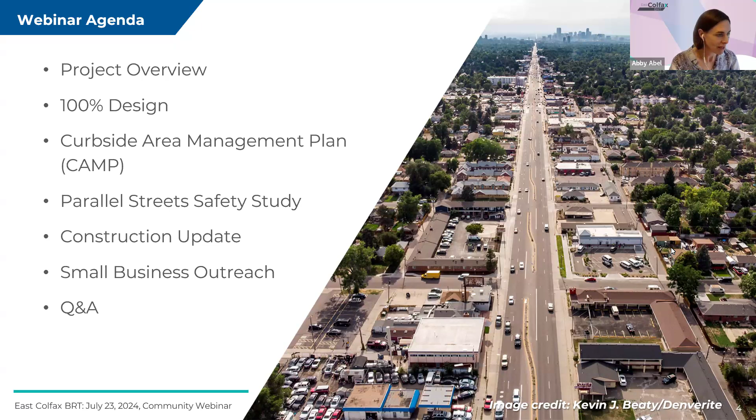To take us through these topics, we have a great team assembled this evening, and I'll take a moment to introduce them, and you'll be hearing from them momentarily. First and foremost is Jon Stewart, who's the project director for this project from Denver's Department of Transportation and Infrastructure. James Moore, who is the design lead on the project. Nick Vanderkwaak and Charlie Alexander have been leading a lot of the transportation components of this project, particularly the CAMP, the Curbside Area Management Plan, and the Parallel Streets Safety Study. Marcy Lochran will be taking us through the construction communications and the plan. And Ryan Lewis leads small business outreach and will be taking us through some of that in conjunction with Joanne Greek, who joins us from Denver's Economic Development and Opportunity Group.

And so we look forward to hearing from this team this evening. And with that, I will turn it over to Jon Stewart to take us through the project overview. So Jon. All right, thank you, Abby. Everybody, thank you for joining us for this webinar. Let's get right into the project overview. First, I kind of want to just reiterate why we're doing the project and what the project is, just give a brief recap.

The vision for this project is to move people more efficiently, safely, and sustainably along East Colfax Avenue. That highlights three priorities we've heard from the public, the citizens of Denver, over and over: to provide more transportation options, to increase safety of the transportation network, and to provide more sustainability and environmental resilience. We believe this Bus Rapid Transit project hits all three of those goals.

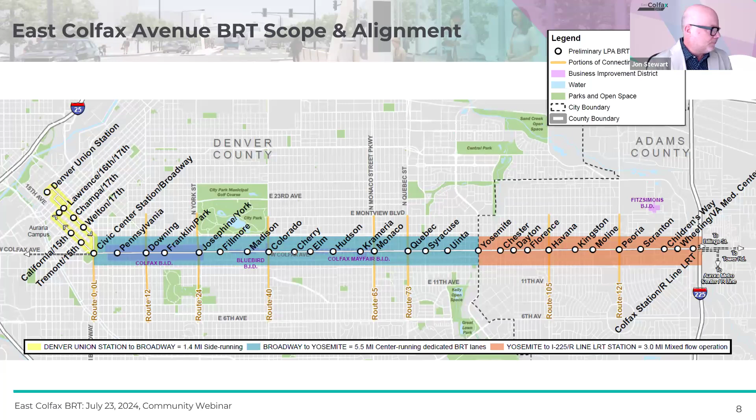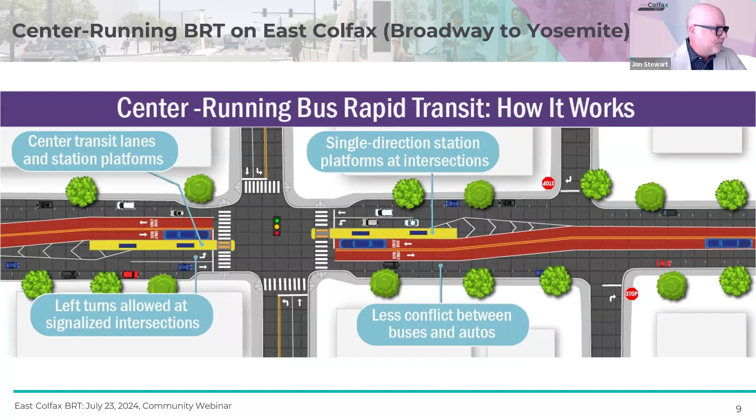This promotes less conflict between buses and cars, allowing buses to move more quickly. Left turns at signalized intersections promote safety, since we currently have a lot of conflicts between left-turning vehicles and bikes and pedestrians. This also shows the center-running bus lanes with the station platforms.

So where are we in the project? We've just completed 100% design this month, so we'll be sharing those design plans with you. Earlier in the year we submitted our request for FTA funding, which occurred in the spring, and we finished our environmental review, also in the spring. Earlier in the year we finished our 90% design, which was our last touch point with the community. Now we've basically submitted everything to FTA, our design is complete, and we're waiting for official notification of our final award amount. With that anticipated this summer, we expect to go to council with a construction contract with our general contractor, Kraemer North America, in August.

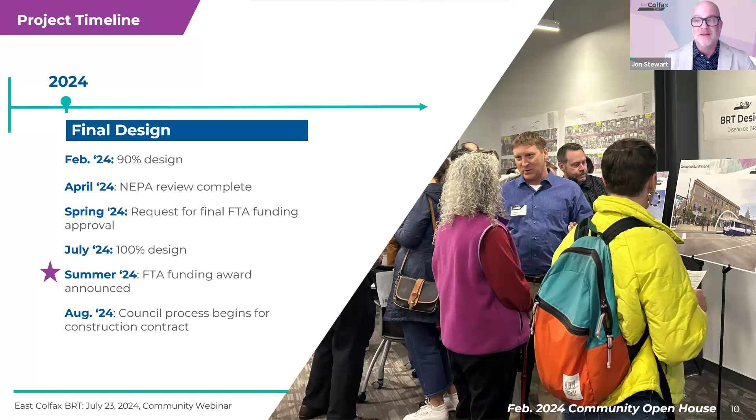Let's talk about where we're headed. We're finishing the final design process right now, having completed 100% design this month. We're waiting to hear from FTA for the final go-ahead, and expect to go to council next month for the construction contract. Once that's complete, we'll issue a notice to proceed to the contractor, expected toward the end of September, with construction starting in October along with a groundbreaking ceremony. We expect construction to start this fall and take about three years, going until the end of 2027. We're basically waiting for written confirmation from FTA on our approval, and then we'll move to construction this fall.

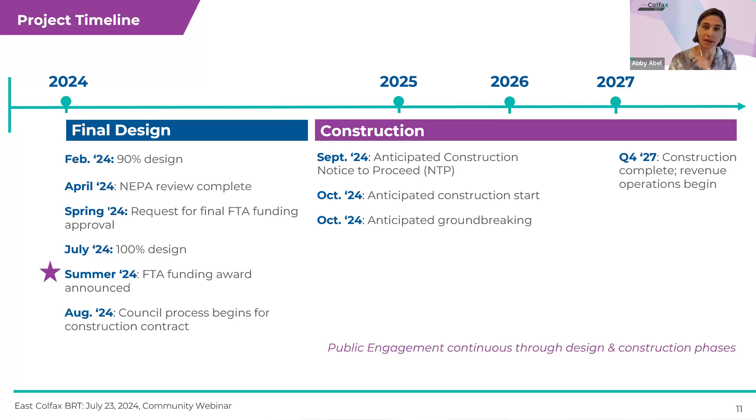Thank you for the project overview. We'll shift over to James to talk about design, which includes, to respond to a question in chat, the stations, the streetscaping, and the branding elements. James will walk us through where we are with all of those pieces. Go ahead, James.

So if we can go to the next slide here. To start, I'll give a recap of key BRT features for those of you who maybe weren't attending the previous webinar.

Dedicated bus lanes, as John mentioned, will exist in the center running portion in Denver. Specialized vehicles, RTD will be procuring a new fleet of 60-foot articulated buses. They'll have 3 doors versus the 2 doors they have now, transit signal priority equipment on board, and will allow for bikes to be loaded at the rear door versus on the front of the bus, like you see today. Enhanced stations feature near level boarding, which provides a rail-like experience, off-board fare collection, digital passenger information displays, and all the BRT branding treatments that go along with the new stations.

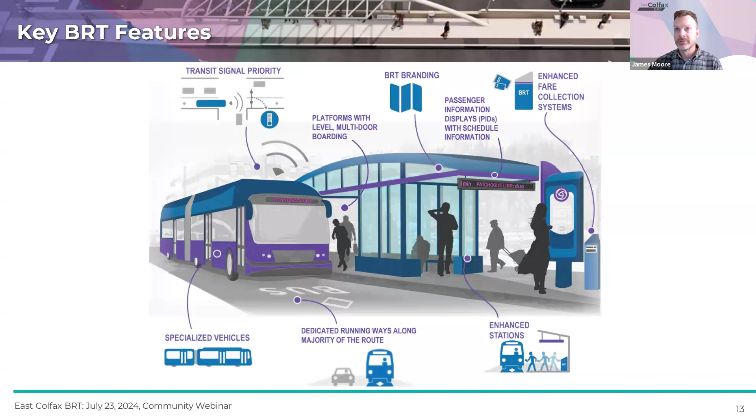100% design advances. The 100% milestone is an exciting one for the design team. As you can expect, design advances from 90 to 100% were not significant, and primarily involved wrapping up some of the more detailed elements on the project, many of which are related to utility, drainage, and structural items below the road.

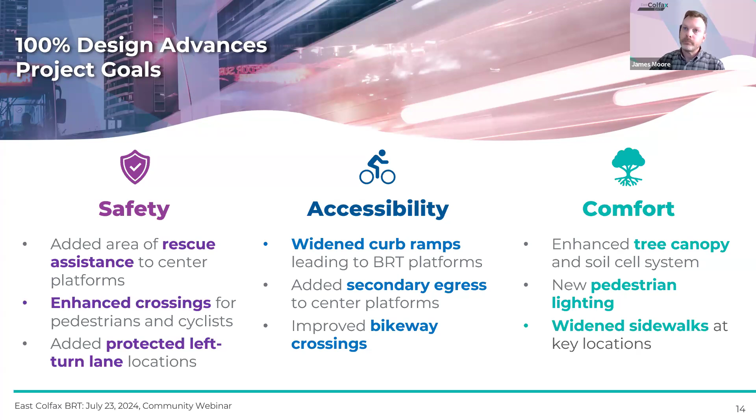We remain focused on the project goals you see here on this slide as we progress toward the 100% design level goal. Safety, accessibility, and comfort all informed our design decisions, and many of the design elements on the project check 2 or more of these boxes. Next slide.

This illustrates some of these project goals that occur at the station. Outside the station, we're proposing 6 signalized ped crossings, which falls under the safety category. As John mentioned, in the center running segment, all left turns from Colfax are protected at signalized intersections, again eliminating points of conflict, which greatly increases the safety of both vehicles and pedestrians. We've also got secondary egress points provided at center platforms, as well as emergency telephones.

When it comes to accessibility, all the elements on the station meet or most often exceed ADA minimum requirements. We've got, hard to see here, 8-foot wide curb ramps that run north-south to the center platforms. Those exceed the minimum requirement of 5 feet in the City and County of Denver. We've got gentle slope walkways from the crosswalk up to the platform. Again, it's not a ramp, it's not steep enough to be considered a ramp, it's a flat slope, and that also checks the comfort box.

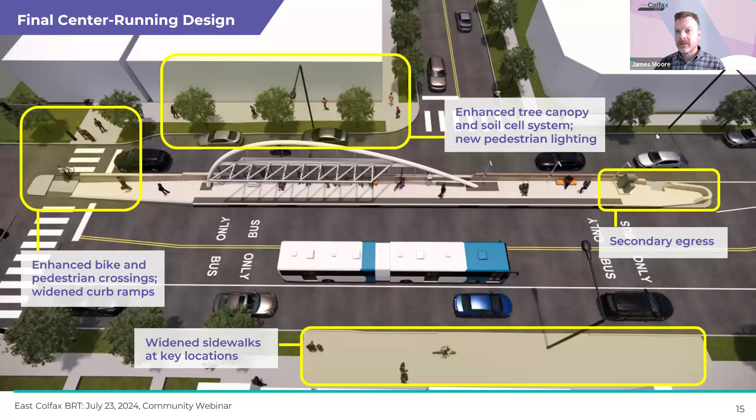I think Abby, you're going to handle that. Yep, part of the presentation. Thank you, yeah, appreciate that, James.

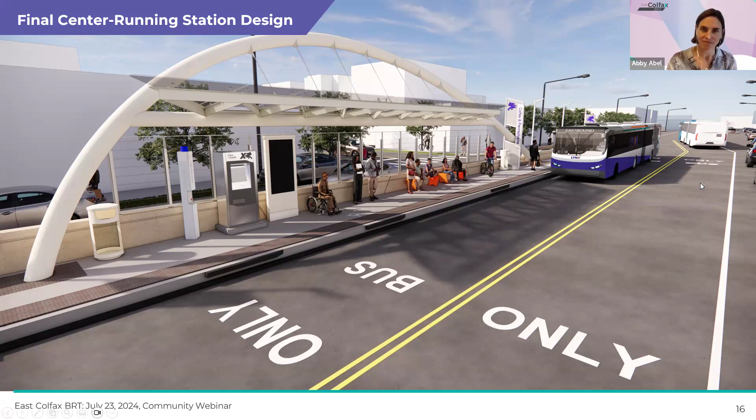I think you can also see some of the light branding on the stations and the buses too, as we move through some of these renderings. More exciting news to share is around that public art piece. So a little setup here before we share the news. As a reminder, 1% of any capital improvement project over $1 million undertaken by the city must be set aside for the arts. Just a reminder there.

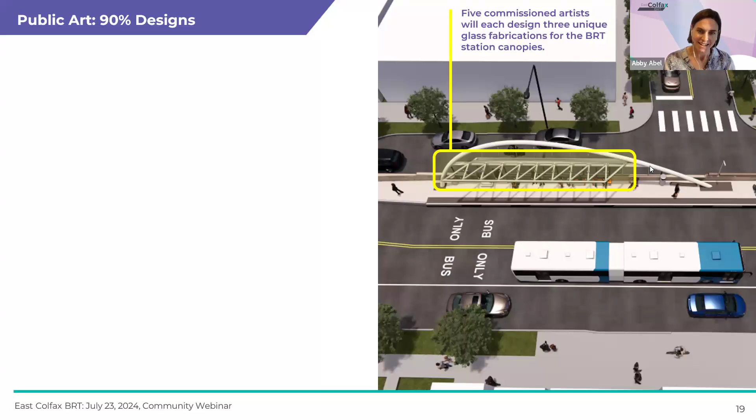Earlier this year, Denver Arts and Venues, in partnership with a community-based art selection panel, invited artists to apply for the opportunity to create art for the East Colfax BRT project, in particular for the stations, for the glass pieces that are embedded in the canopy outlined here. Five artists were selected and commissioned to each create three unique glass designs for three station canopies in the Denver portion of the corridor. We're excited to share these 90% designs with all of you tonight, which hopefully capture the feeling of Colfax.

Once these designs are complete, the artists will begin work on the next set of five stations. I can't help but note that 3 of the 5 selected artists are from Denver. Pretty exciting. You can see the artist names right there under each one of their designs.

So with that, hopefully exciting news, I'll turn it over to Nick Vanderkwaak to talk about where we are with the Curbside Area Management Plan, or CAMP. Thank you, Abby. Those are exciting, I haven't seen those. Those look great.

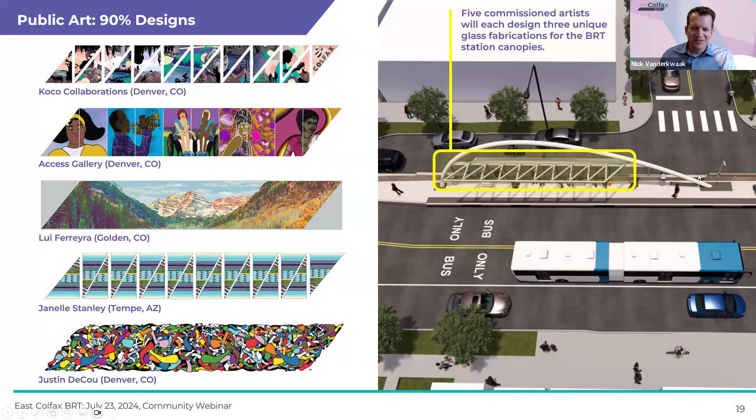I'm going to talk a little bit about the Curbside Area Management Plan and give you an update as to what we've put together as part of this planning process and how that's come together. If you could go to the next slide there.

A little background on what this is. Previously we called it a Curbside Access Plan, a CAP, just to avoid confusion - those are the same things. It's just called the Curbside Area Management Plan now.

The purpose of these plans - DOTI does these in neighborhoods all over the city and county - is to develop and comprehensively address changing conditions in an area, which could include density, redevelopment, reduction in parking supply, and a lot of different things. A lot of these things have already happened in many of the neighborhoods surrounding Colfax, and with Colfax BRT there's a lot more change happening. So it's important to understand the effect that all that change has on the surrounding area and streets.

And what we can do to anticipate and plan for parking and other curbside uses in those areas. In the process, we acknowledge that a lot of people use the streets and the curb in different ways, and understanding the needs of all those groups - residents, businesses, visitors, all sorts of people involved - we want to make sure we're accounting for that in what's unveiled here.

Through this process, we explored different curbside management strategies and put together a series of recommendations that I'm going to share with you, proposing regulations that address not only what's happening currently - which we've studied in tons of detail by understanding parking utilization on all the blocks on and surrounding Colfax - but also what may happen in the future with the implementation and changes happening with Colfax BRT. Next slide, please.

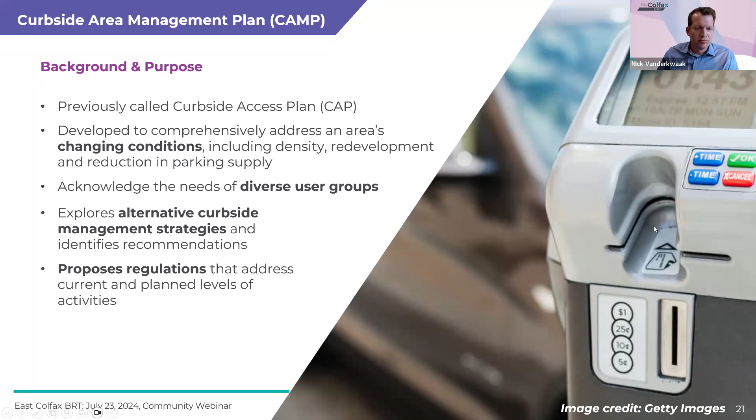So with the process, to describe what we've done: we studied parking on Colfax for the entire length of Colfax BRT and quickly recognized that some of the bigger changes to parking and some of the more densely parked areas on Colfax are in the further western areas, specifically between Broadway and Colorado Boulevard.

So we studied Colfax the entire length, and then started this process, developing this plan, really to look at the surrounding neighborhood streets and what the parking utilization is on those streets, what the existing regulations are, and what we should change to make those function better for all the users that will want to use that curb space. Through that process, we met with a stakeholder group.

We had 3 meetings oriented around this process early on last year and this year. We had 2 rounds of online engagement - many of the folks on this call likely participated in that - where we gathered some of the feedback shown on the map below here. All those points are some of the points we received with feedback. So we had a round where we incorporated some changes, and then another round where we developed more detail. More than 175 comments were analyzed and looked at as part of the process, in addition to the data process we went through to develop this.

And this all turned into one Curbside Area Management Plan, which incorporated updates for loading zones and timed parking restrictions on blocks, and other elements of the plan, including some of the paid parking on Colfax. Next slide, please.

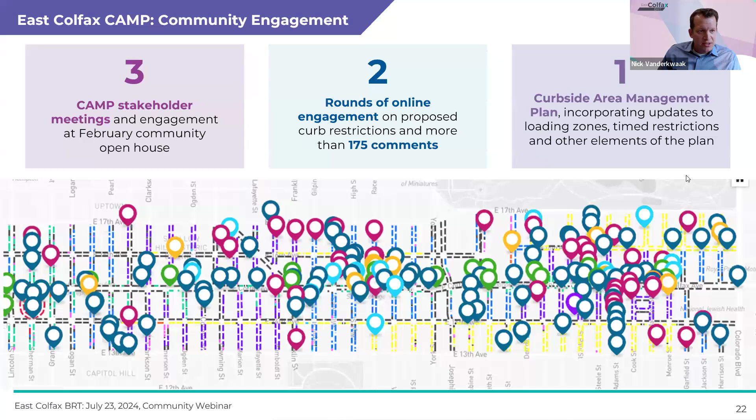I'm going to go through some of the key changes or key recommendations that came out of this effort, and then we'll talk through those.

The first one here is looking at paid parking. A lot of Colfax already has metered parking. When you look at the area west of Elizabeth Street, that area of Colfax where there is parking, it is metered parking currently.

There are a lot of changes and reductions of parking on Colfax with the BRT, so there will be less metered parking in those spaces.

This provides space for the commercial activity that needs parking, and people want to park there for those uses, providing spots that turn over frequently. So there are spaces available, and paid parking with metering is a way to do that. We have more metered parking adjacent to the commercial parcels.

There's none that will be adjacent to residential parcels or land uses along the corridor. And then also on Colfax, on the other side of Elizabeth, as we go towards Colorado, we are introducing the same approach.

The parking on that part of Colfax will also be metered, recognizing that many of those spaces were highly utilized, and making that paid makes it more available for people that need to use it. There will also be choices for other places to park if people don't want to utilize those spaces.

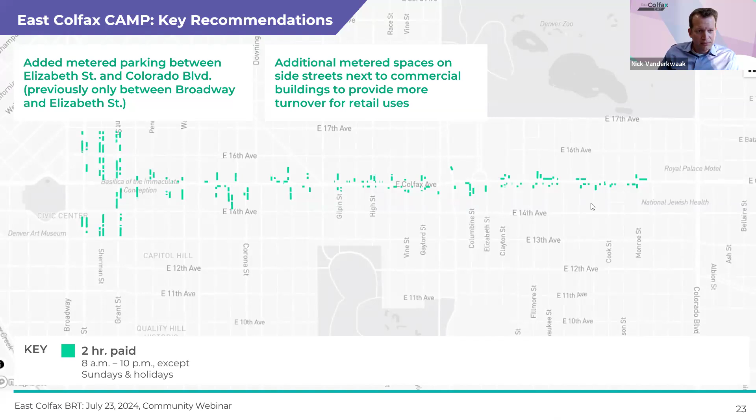The next key recommendation is looking at what do we do with loading zones, shorter time parking. One goal of these planning efforts is to simplify, rather than having minor differences between recommendations.

Making that very clear so it's predictable and people can expect, they know what things mean when they see a parking sign on the street.

Also for commercial loading for bars and businesses and other things on Colfax. Those are mostly oriented on the side streets, primarily that first spot in from Colfax, where a truck or other vehicle that's loading can easily pull in and out.

We've looked at all the land uses on Colfax and identified where the existing loading zones are, and then added some new ones where they make sense to serve the needs of the businesses along Colfax.

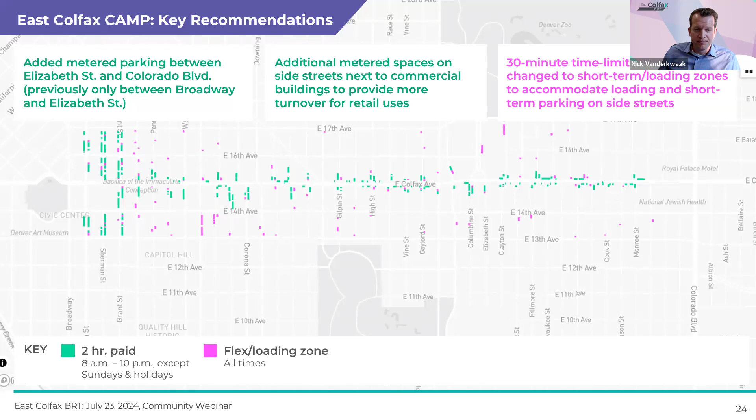Another big change here is standardizing and changing some of the time limits that are established on many of the side streets on Colfax. We've standardized them to 2-hour parking from 8 a.m. to 6 p.m. and 3-hour parking from 8 a.m. to 10 p.m.

Both of those serve different needs of the different land uses that are adjacent to, and along, Colfax.

This allows enough time for people to dine a little bit longer and do business on Colfax, experiencing Colfax while parking their car in those locations.

Part of that process was incorporating current streets that already had time restrictions, as well as some streets that don't currently have time restrictions.

We're recommending those be put in place to provide enough parking for folks to use, but not park there indefinitely. With these time restrictions, residents have the ability to get a resident parking permit that exempts them from those restrictions.

So residents can park there for as long as they want, but others that are visiting will be subject to these time restrictions.

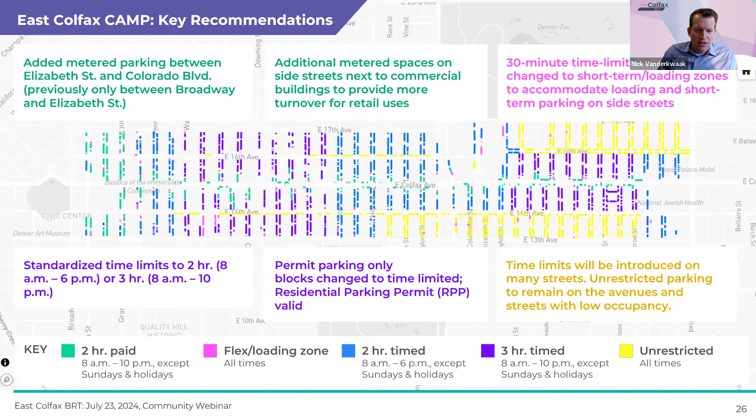The last one I want to talk about is the time limits introduced on many of the streets. We still are keeping some unrestricted parking. The streets shown in yellow here will remain available for anyone to park on.

They won't require residents to have a residential parking permit. Anyone can park there. This was based mainly on low occupancy rates and also being further away from Colfax.

And then also the avenues, the east-west streets, those generally are remaining unrestricted to allow a place for people to park that need to be parking their vehicles for longer than 2 or 3 hours.

That theoretically could be workers at businesses on Colfax and things like that, people that need to find those parking spaces.

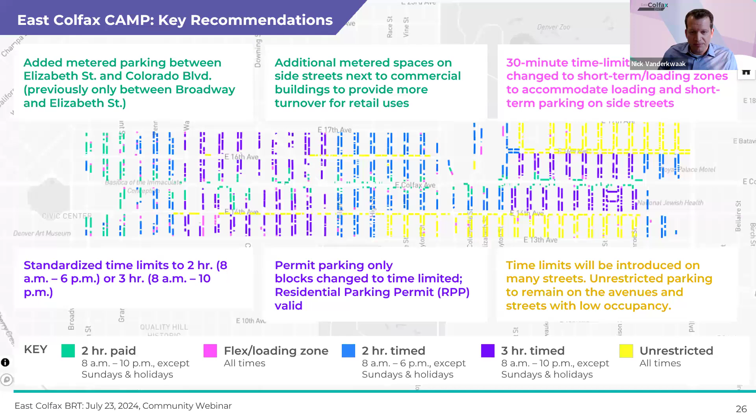So all of these recommendations and the plan will be available very shortly. We had intended for those to be online. DOTI has a website where they keep all of their curbside area management plans. That will be up there likely tomorrow or soon after this week. This link will take you there.

You can review and look at everything I've presented on there. And if you have any specific questions, please email parking.operations@denvergov.org with Colfax CAMP in the subject line, and someone will respond to any of your questions or concerns. We really thank you for all the participation you've given into this process to get us to where we are.

Great, appreciate that, Nick. And we're going to hand it over to Charlie to talk a little bit about the parallel street safety analysis.

Thank you, Abby. So we've been hard at work over the course of 2024 on our study of the streets parallel to Colfax Avenue, specifically 13th, 14th, 16th, and 17th Avenues.

I want to start by mentioning we have analyzed a lot of data in developing recommendations for these streets. I'll speak first to crash and traffic data, and then to input we've gotten from members of the community on these streets.

We studied 5 years of crash data, the most recent 5 years available to us, and you can see the numbers here that a lot of crashes have occurred on these corridors. The 539 resulting in a fatality or injury includes injury of any level, from complaint of pain all the way up to severe injury.

Those numbers are not consistent with what the city wants to see, and with its Vision Zero goal of eliminating fatalities and serious injuries on the system. These corridors tend to experience more crashes than you'd expect on similar corridors. Obviously the goal is zero fatalities and serious injuries, but when we look at all crashes, there are many locations on these corridors that are above average, with more crashes than expected.

From a speed standpoint, no matter which way you look at it, speeds are high on these corridors. We've identified statistics related to the speeds people are traveling, but the data generally reinforces what we've heard from the community, that it's not just the average or statistical measures of speed, but the number of people going over the speed limit, or going at very, very fast speeds on these corridors.

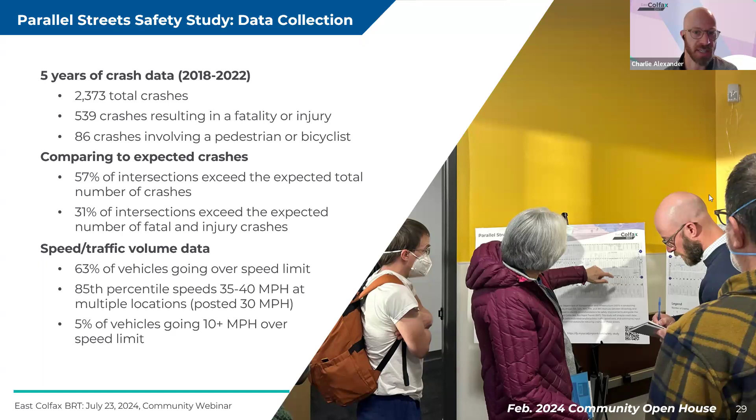We also did a lot of work to supplement that crash and traffic data with public input, and many thanks to everyone here tonight and others who participated in our open house, in our online map tool, and took our survey. You can see lots of responses that we've been able to process and develop recommendations around.

We were able to visit with 7 RNOs over the course of the first half of 2024 to have deeper conversations with those groups about these corridors. The concerns that came out of those groups, the top concerns, generally centered around concerns when walking along or across these corridors, and how that relates to infrastructure for pedestrians.

Sight distance, the ability to see down these streets and judge when it's safe to enter or cross them, and then the width of the streets, as well as the speed of the streets, and the relationship between those two concerns.

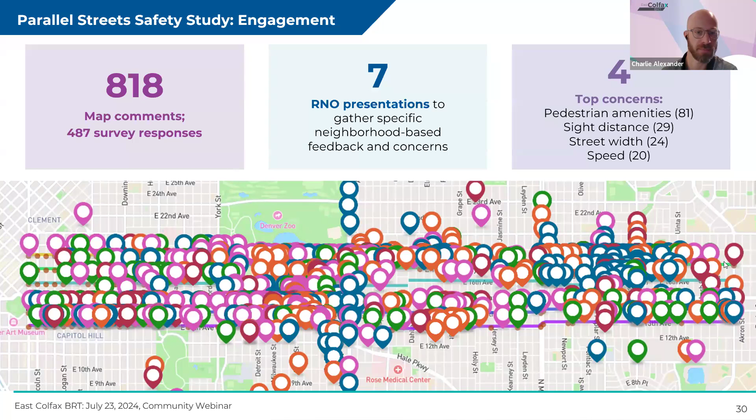So when we look at the data and the concerns documented through comments from community members, what we found is that the concerns really boil down to the 6 categories that you see here.

The first is an underlying concern that exists across all these corridors and exacerbates other crash issues, which is that speeds are high on these streets, as I pointed out earlier. The specific crashes further exacerbated by speeds include broadside crashes at signalized intersections.

These are often related to red light running on these corridors. Broadside crashes at unsignalized locations - these are locations with stop signs on the north-south streets, where drivers find it difficult or unsafe to enter the street because they can't see far enough down it.

Crashes involving people walking or people biking. Overtaking turn crashes - these are crashes where a vehicle turns from the wrong lane and crashes into a vehicle headed straight in the lane they're in. And then head-on crashes, which obviously result from people driving the wrong way.

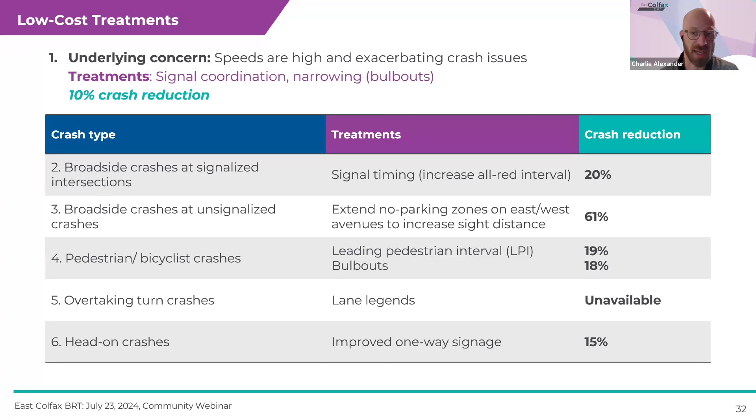Next slide. I do want to touch briefly on other higher cost treatments and treatments under assessment that we're considering. Different technologies to help further mitigate red light running crashes, doing our construction with more permanent materials rather than the quick build materials, which comes at a higher cost, but we've heard from neighborhoods are preferred from an aesthetic standpoint, as well as improving pedestrian crossings.

We're also assessing different treatments that we think would have an even greater crash and speed reduction effect than the short-term and low-cost things that we can do. Things like realignment of the street within the right-of-way, or vertical traffic calming like speed humps, red light cameras, reducing the number of travel lanes, possibly converting segments of these streets to two ways, long-term consideration for a bikeway, and different neighborhood traffic calming on local streets. Each of these requires a greater deal of feasibility assessment than we've been able to do thus far, and is something that is going to continue to happen alongside BRT construction - the assessment, that is.

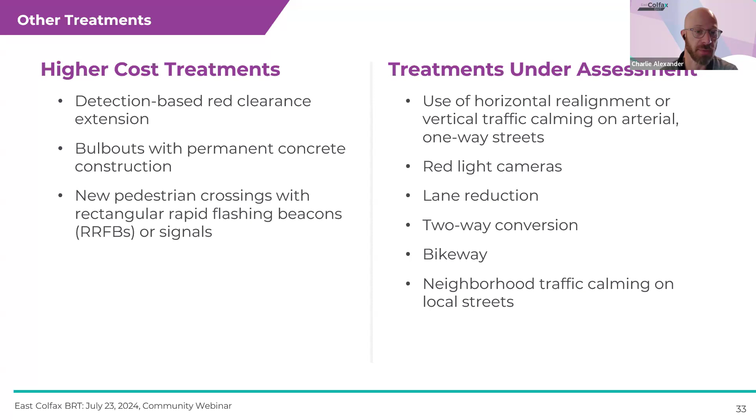So I'll close out this section on the last slide here, just to mention that our next steps: we do plan to publish our summary report later this summer, begin implementation of those low-cost treatments alongside construction of BRT, complete that assessment of those higher cost and higher efficacy treatments, and also pursue funding for those. The implementation timeline and the specific yes or no decisions on that are still up in the air, but those are things that are going to continue to be explored in the months and years to come, as we really try to do as much as we can to improve the safety on these corridors and achieve the Vision Zero goal, both in Denver and on these corridors parallel to East Colfax.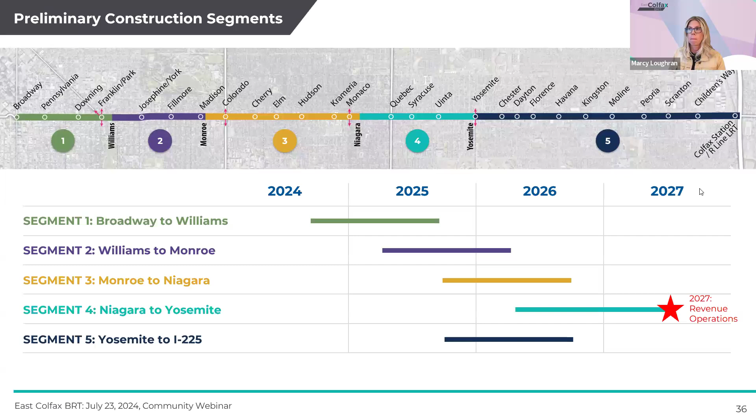Next slide. So here we're showing the phasing of the work anticipated in each of the segments, with particular focus on station construction and full depth pavement reconstruction. We're showing that because it's a larger work area, so you're going to see more cones and construction barriers. There are other activities happening, of course, but the station construction is really the driver for how we plan the work in the work areas.

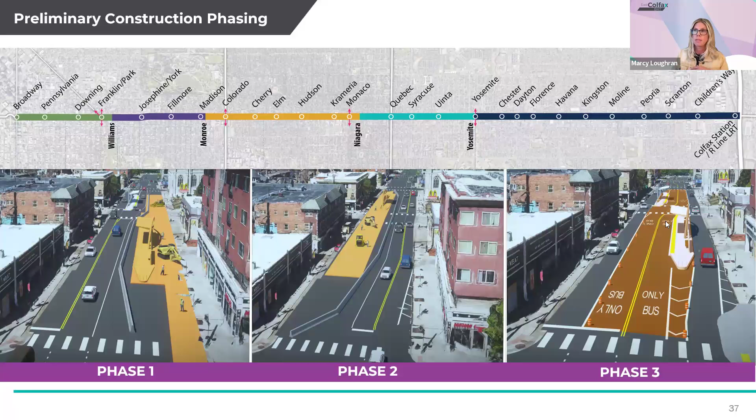Some of the early construction activities we're going to be looking at are the site investigations. You often hear that called potholing, that's when you go into a specific area of the street and dig down to see what's down there. It's really just investigating what we'll see when we break into that asphalt. That will start to happen along the corridor as an early activity, we like to know what we'll run into before we get there.

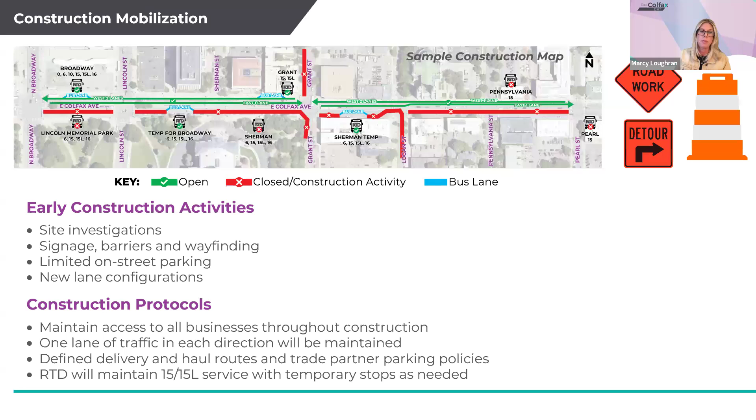Now let's talk about construction outreach and what you can expect from us. Hopefully you're going to hear a lot from us. We're going to be sending direct mails and e-blasts, so we definitely encourage you to sign up for those construction updates.

We'll start to push those out about a month before we start construction. We want to do a nice ramp up to when we get started, so everybody's on the same page, no surprises, and knows what's happening and when.

I think that's good. Appreciate that, Marcy. Hopefully that gives all of you clarity around what to expect and how to engage with the construction communications team. Marcy mentioned businesses.

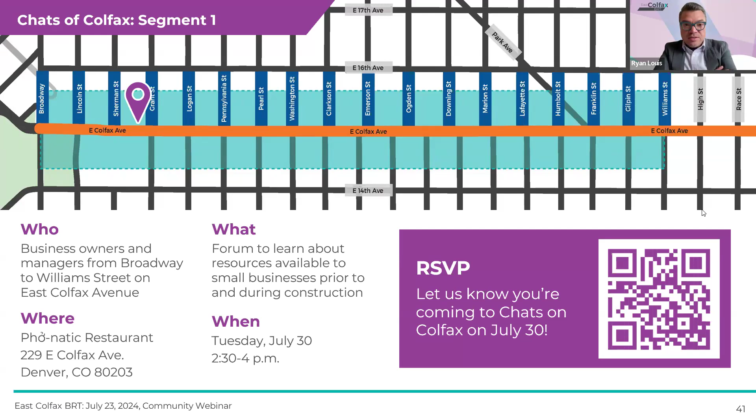Okay, so now let's go into some of those specific resources I mentioned. They're on the next slide.

There's one for folks in Denver and one for Aurora. This is designed to help you think through how a business may be impacted by construction and the best ways to prepare. Our friends at DEDO are on hand to follow up with anyone who could use a little bit of extra help, things like referrals to various business supports and technical assistance. So be sure to submit those when you're ready.

And segue, now to talk through available grants, I'm going to turn it over to Joanne Greek from DEDO.

Hey, good evening, everyone. I'm pleased to announce that the City and County of Denver will offer a grant program to support businesses whose revenue may be impacted by this construction project. Because the program is targeted to Denver's smallest neighborhood-serving businesses, eligibility will be restricted to businesses earning annual gross revenue between $30,000 and $5 million.